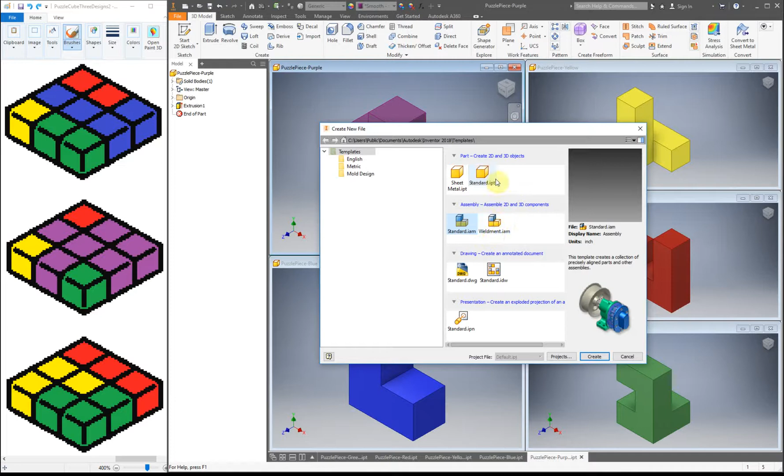So what we can do is go to File, New, and then the one we're going to be using for assembly is the standard.iam. Don't use the weldment one, we're not welding, we're just building. So standard is the one you're going to want. If you double click on it, then you will have your file in a second.

Alright, so I'm going to make this one full screen. So what we can do is place in the files. You can place each of these in individually if you want. When I have a whole bunch already set up, I like to place them in kind of in a chunk. You don't have to, you can just keep grabbing them, but it's really up to you.

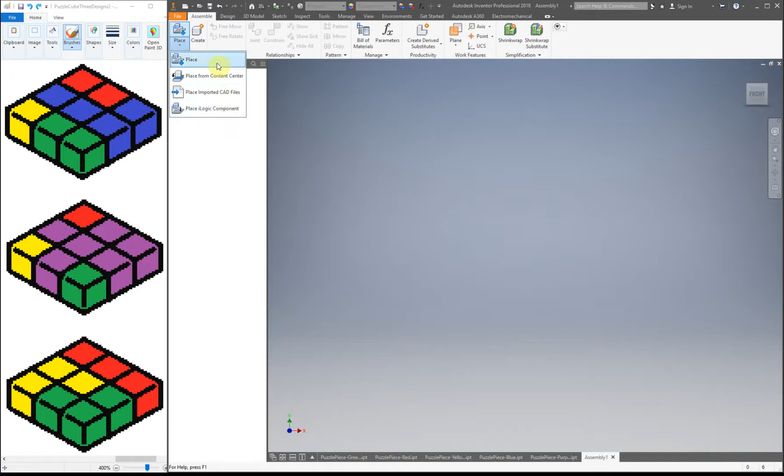And where you're going to find these files to grab everything is you're going to go to Place, and right underneath File, you're going to want the one with the cube with the blue arrow. So there's a couple different options. The one that we're going to be using is this one, the cube with the blue arrow. And I already have my files open, so it kind of knows what I'm going to be using. But if you don't have your files open, then you're just going to have to go to this drop-down menu, find wherever you placed your files, and grab them from there.

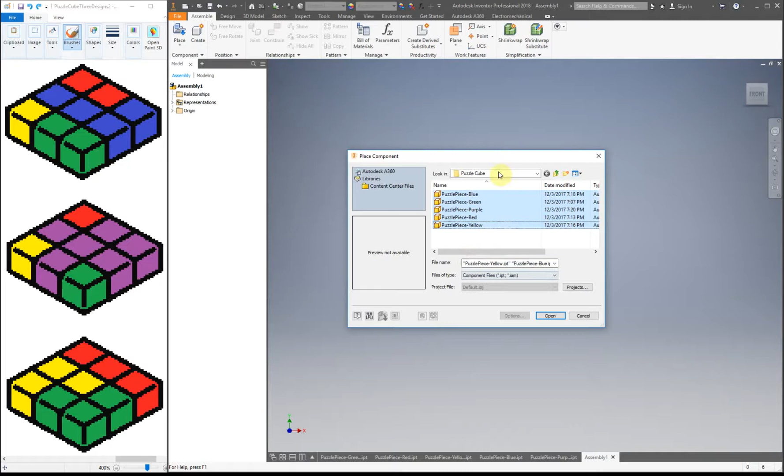So again, if you press on the top one, Shift, click on the bottom one, all of them are now highlighted, and then I can click Open. So I'm going to click once, and then right-click, and then OK. Or you can hit Escape on the keyboard. So you can see how I have now all of my pieces for our puzzle.

So the first one that I'm going to work with, I guess, will be this one, because this is oriented the same way that I have it in my puzzle. So what I'm going to do with this one is I'm going to ground it, right-click and ground it. So you can see this little thumbtack now in the little cube icon next to puzzle piece yellow. That means when I click on it, it's not going anywhere. But if I click on this one and move it, it can move anywhere it wants to.

You can also tell, because this cursor, so it's your normal cursor, you move it over here, it has a little thumbtack reminding you that it's kind of stuck in place. It's pinned. The reason why we want to do that is because this cube, or this is now locked into this cube. So when I turn this around and everything, you can see how all the pieces are moving nicely.

But this cube and this piece are linked now. So all these other pieces, you can see how this one, this J-shaped one, is not at the right angle. This little purple fish one, not at the right angle. The blue L, not at the right angle. But our green piece is actually the correct orientation.

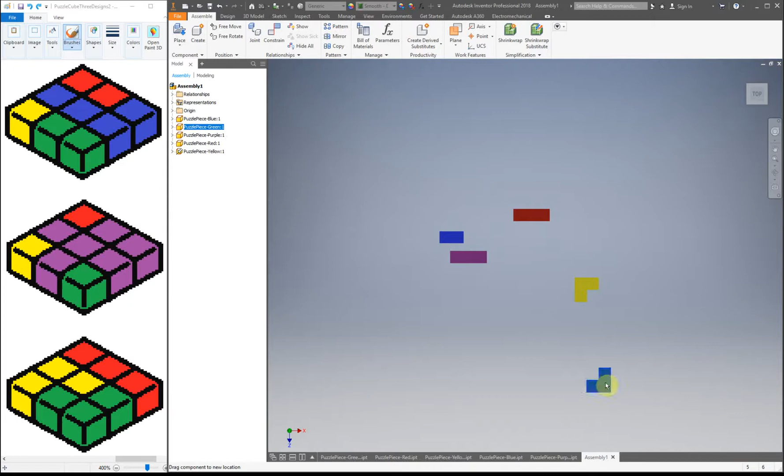So this piece, it looks like it's free, looks like it can do whatever it wants. But if we go from this angle, you can see it's really just moving up and down. If we go from the top, and it can move side to side.

So it is constrained slightly, but from this angle it looks like it's moving wherever it wants to. So the next thing I'm going to do is now add flush. Alright, so I'm going to close out of that one again. So now it looks like it's just going up and down, and that's really all it's doing. But we want these two to be lined up about there. So I'm going to just shift that so you can see actually what happens. I'm going to use flush again.

And apply. Let me exit out so you can see again. When I click on it, that one doesn't move. Click on this one, then we have this little symbol that tells you it's not going anywhere. So you kind of wiggle the parts around to see if it comes apart. If it does, then you know you've got to constrain it more.

But if it stays put, then you know you did it right. Alright, so the next piece, I guess I'll do this red piece. Some people like to take these pieces and rotate them before they attach them. Personally, I think it's an extra step that is not necessary. So what I'm going to do is use flush for this edge and this edge, and that will actually rotate it so now that J shape is in the correct position.

Alright, the next thing I'm going to do is use our mate tool to glue this surface to this surface. You can see how this isn't quite lined up yet. So next thing we do is flush this one and this one, and apply. Next one I'm going to do is our fish.

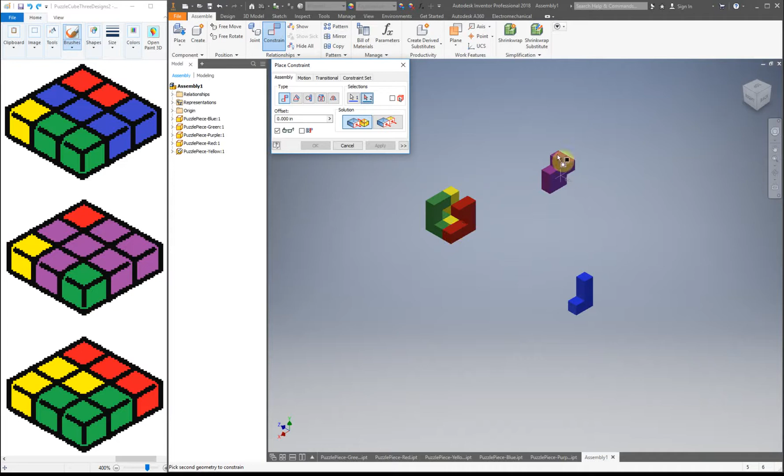I'll add that one in because adding the blue one first and then trying to add this one in, it's a little tricky to see what you're doing. So just like I did before, I can rotate it while actually connecting it together. So I have my one surface selected, my other surface, apply. So now they are connected.

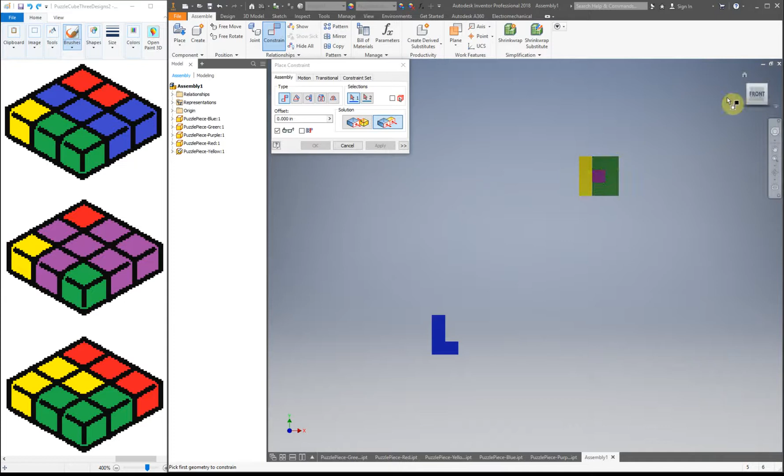And I've got to rotate this because if you look at it, it isn't lined up properly. So I need to have this surface and that surface flush. And now it's a little hard to see what you're selecting. So there's two ways I can do this. I can kind of tip this one and select the purple and then green or yellow, or I can come in here and, actually I'll do that one.

The second way is I can click on here with the mate tool, turn it, and then click on this green section, and then apply. So those are now connected together.

And then with this last one, let's see, if we are rotating this, then we want to mate this surface to this one. Apply, and flush, and flush.

And I'm just going to show you what happens kind of when you do this. So that doesn't wiggle around, but then when you do this, it kind of still moves. So we have that last one piece to do.

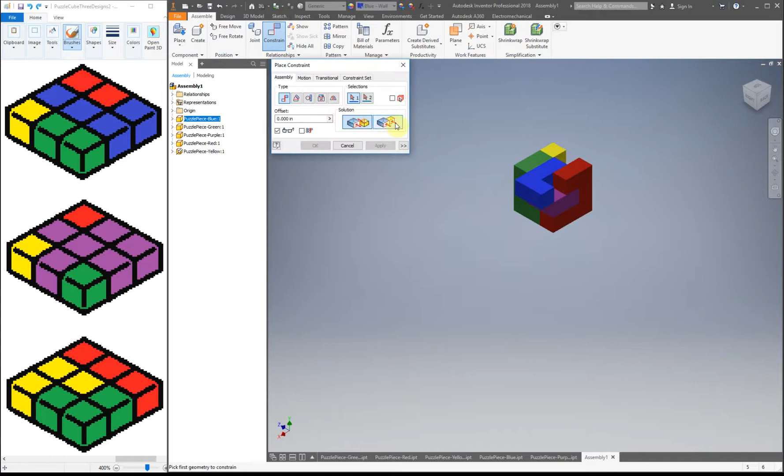Alright, so that one, I'm going to do flush for this one. Actually, yeah, but we could also do mate and then connect this surface with, if I can turn it, that surface. So for mate and flush, it really depends on where you're clicking for which one would be the best one for what you're doing.

Alright, and then if we just rotate this, so we can see our top is exactly how it is in our sketch. And our middle, we can see these blocks, which are these ones right here. And then our bottom edge, we can see our bottom edge right there. So everything is all connected.

So what I like to do just at the end, just to make sure everything's connected in place, I click on each color individually and kind of give my mouse just a little bit of wiggle, and then make sure everything is properly in place.

In case you make a mistake and actually have to undo something, if let's just say this piece was flipped the wrong way, I can go here and see we have the mate and flush. So we have 2 flushes and 1 mate. To constrain all of these, you're going to end up with a combination of 3 - could be 3 mates, 3 flushes, or a combination of the 2. Doesn't really matter, but it'll be 3. It might be a few more depending on where the piece is.

This was the last piece I put in, so that's why it definitely only had 3. So I'm going to now just delete this constraint, and you can see now that I can move the piece up and down. Okay, so now I'm just going to add back in a constraint, so then it'll be put back in the correct spot. So for this one, I'll just do a flush, apply. So I changed what was a mate to a flush, just to show you how to delete these.